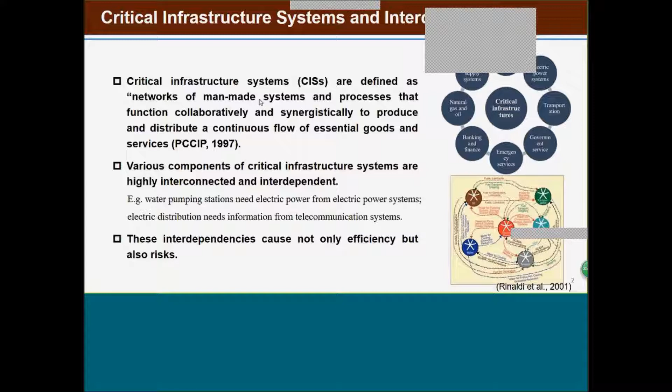For example, when hazards come, some infrastructure facilities are destroyed, and then the disturbances propagate through the interdependencies, and restoration efforts are taken to recover the system function. So here, interdependencies play two roles.

First, interdependencies may aggravate the disturbance propagation. For example, outages in power systems can cause subsequent failures of traffic signals and water supply pumping stations.

Second, interdependencies decelerate the system recovery because, for example, the function of water supply pumping stations will not recover until the power supply recovers, even if the pumping stations themselves are restored.

Here is an example of the 2008 Chinese winter storm. The hazard influenced transportation facilities and electrical power facilities, causing many consequences like communication breakdown, electrical power shortage, and fuels inaccessibility to power plants, which aggravates the electrical power shortage.

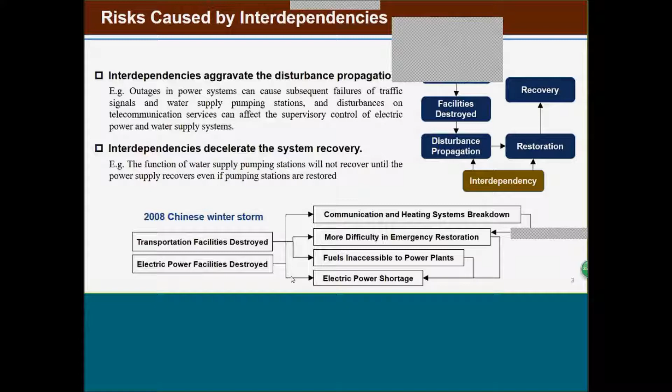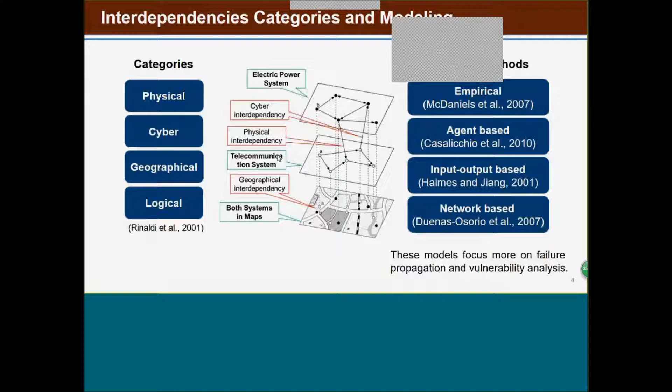So interdependence has been researched in many aspects. First, Rinaldi divided interdependency into four categories: physical, cyber, geographical, and logical, and there are many models.

Modeling methods were proposed to model the interdependencies, such as empirical, agent-based, input-output-based, and network-based. But these models focus more on the failure propagations and vulnerability analysis, not including the recovery stage.

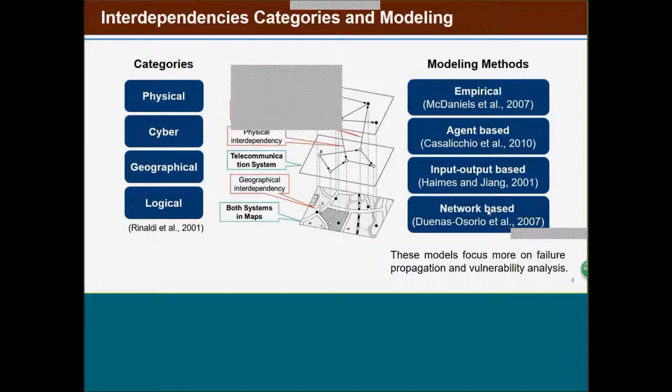So the concept of resilience provides a new perspective to assess the vulnerability and recovery speed, because resilience has two stages in my study.

I divided it into two stages. One is the resistance stage, where the quality of infrastructure decreases, and then restoration efforts are taken so the quality of infrastructure is recovered. I use Bruneau's measurement of resilience to assess resilience in this study.

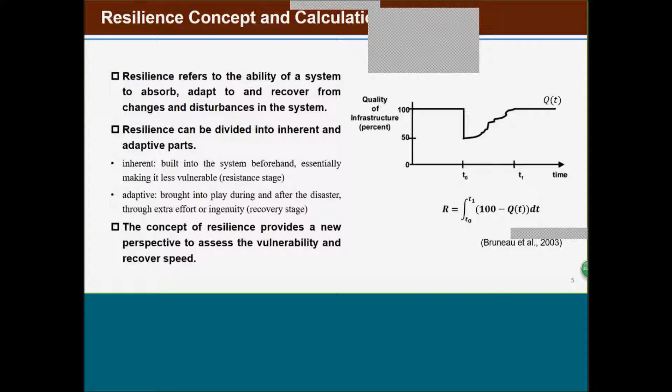So what are my research objectives? I'm going to assess the impact of interdependencies on resilience assessment. This can be divided into two aspects: one is the impact on system quality loss in the resistance stage.

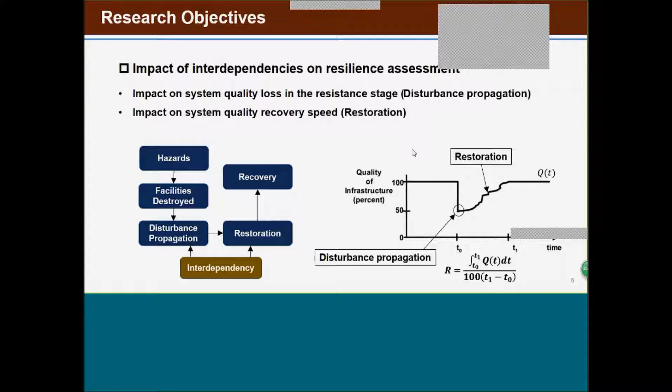Interdependencies can influence the disturbance propagation, which influences the quality loss in the resistance stage. And the interdependence can influence the restoration, which influences the recovery curve in this figure. So my objective is to assess these two impacts.

My method is to take three assumptions across three groups. The first assumption is not considering interdependencies in either the resistance or restoration stages, because this means I regard these critical infrastructure systems as separated, with no interdependence between these systems.

The second assumption is considering interdependencies in the resistance stage only, which means the dependencies between these infrastructure systems. The third is also considering interdependencies in the restoration stage.

This means I optimize the risk to get a faster recovery speed. So I use multiple existing modeling approaches to prove that the modeling approaches or metrics will not influence the simulation results.

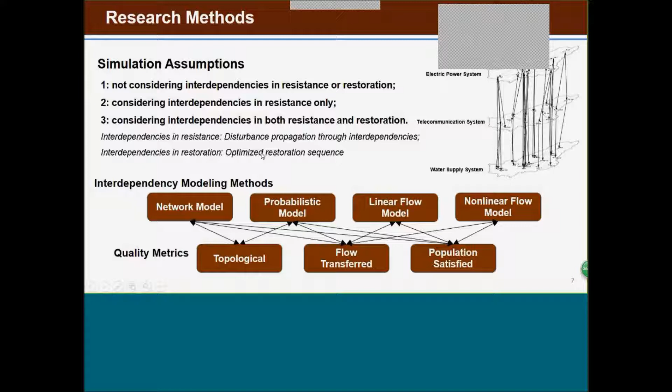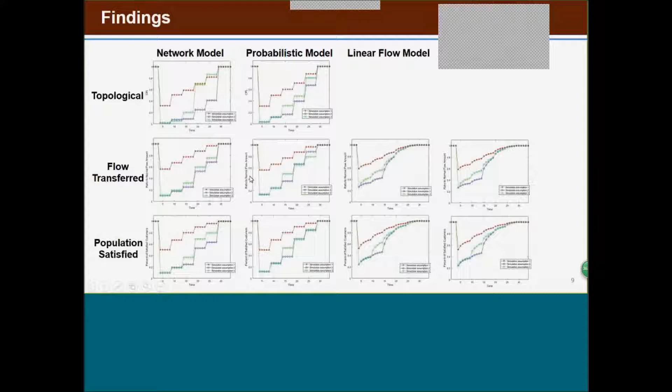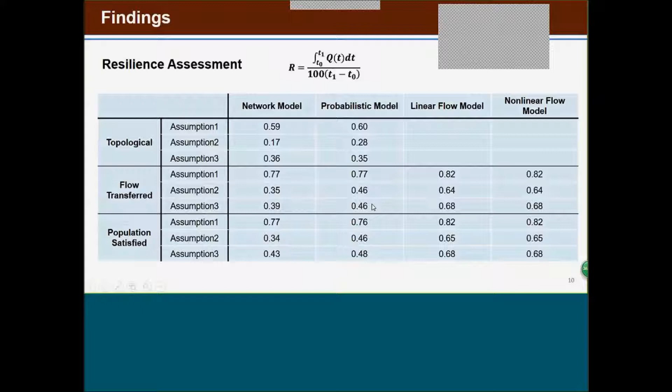This approach described in the study is applicable to CISs which are well networked and whose flows can be measured and recorded. And that's all for my presentation.

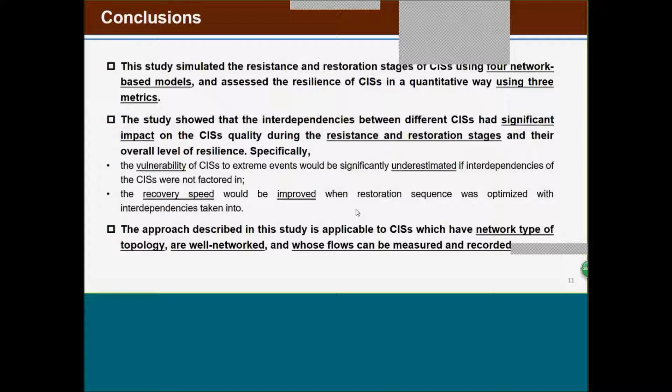So Chen, your research is looking for some kind of evaluation approach for interdependencies of infrastructure, is that right? Are you looking for some kind of metric which would be suitable to measure interdependency among different infrastructure systems? Is that correct?

Not exactly, no. I just want to show the interdependencies between critical infrastructure systems have a large impact on the resilience assessment, which means the interdependence will influence the quality loss. Maybe this point will be lower if there are interdependencies between infrastructure systems. And if I optimize the restoration sequences, the recovery speed will be much higher or improved. I want to prove these two impacts.

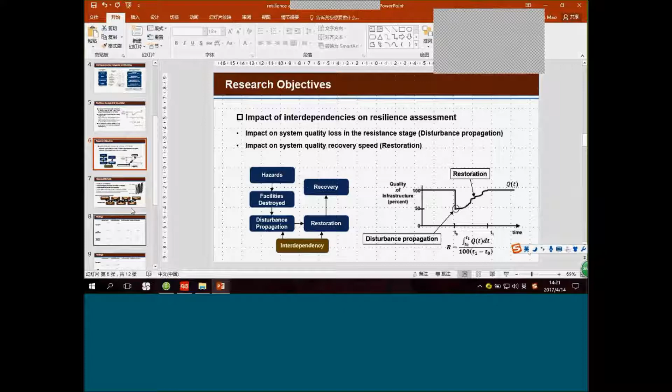The characteristic path length is about the average of two nodes, the shortest path between two nodes. So I calculate the average of these paths.

I want to see the connection situation of the infrastructure systems, so I also use the flow transferred, and population satisfied, right? Because infrastructure facilities, they may satisfy this community, or one community, or two communities. So I use the community population relative to these facilities.

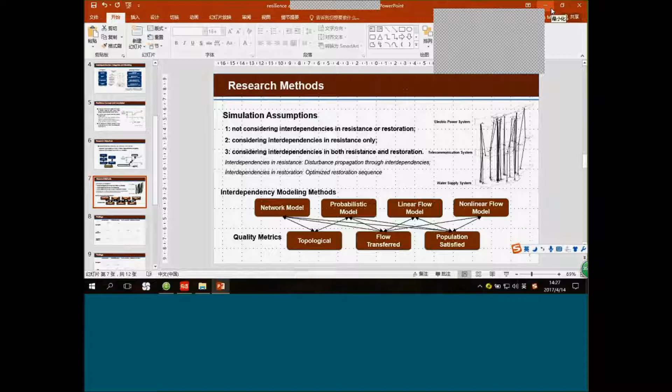Again, yeah, we can follow up later. That's just my comment and ideas. Yes, thank you, so that's good. Very good, thank you so much.